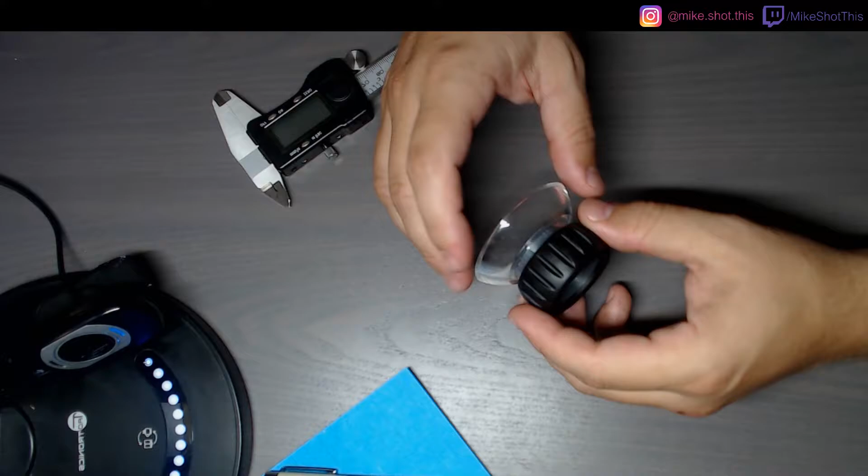Today I got this thing. This is for old people like myself who cannot see very well. So when I'm looking at film, I've started using it.

So you can kind of start to see, but it is a magnifying glass in there. And so generally speaking, I will look at it to make sure that the image is in focus or something of that nature, and look at any scratches that might exist on the film. But that doesn't really help the stream work.

So I have an old webcam that I am planning on setting up to use something like this. So let me get it lined up here, and then we'll focus it.

That looks a little blurry to me. That's about right. But I don't want to tape this down, because it might not line up very well.

So my plan is to simply - well, simple is a relative term - make a mount that fits here and holds this camera right where I want it, right about there. I'll get it actually centered up once I start measuring. The idea is I want to be able to show you guys what I'm seeing when I look through this. So we have to start with, what do I know? Let me jump back to this a little bit better for you guys.

So I know the piece needs to fit onto here, so I'll need to figure out the diameter of this. And then we'll need to figure out the size in this direction, and then we're going to make a piece that fits down and maybe even clips in over the top and clips underneath this lip. It's kind of hard to see, but we'll have it clip underneath this lip, and then we'll have it clip on either side of the camera - right here and on the other side, and potentially on the top or the bottom here.

So what does this piece need to look like? This piece needs to look like this, and then it'll come out to here and clip over. So that's the rough idea of what I'm thinking. This will sit here, and the camera will plug in here.

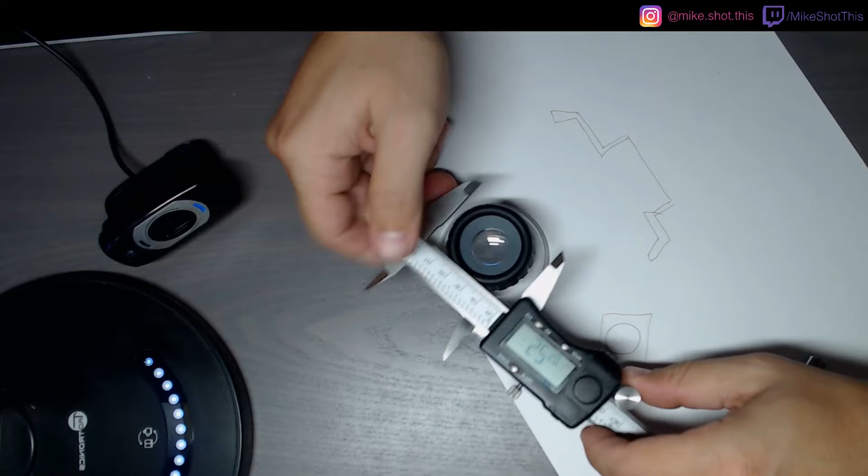Now let's measure the diameter of this bad boy, which is about 45 millimeters. We'll call it 45. This says 44.87, so close enough to 45. So we know that this dimension, the inside dimension, not the outside, needs to be 45 millimeters.

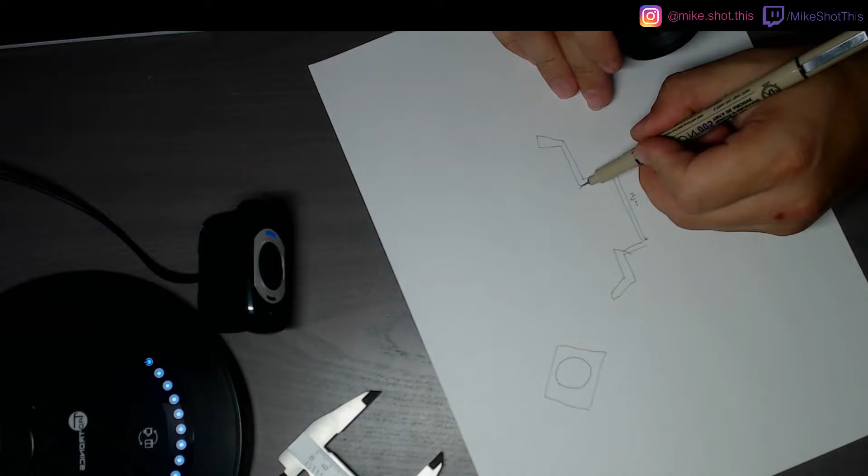And then we actually want this camera to live immediately on the surface of it. We don't want to have a gap or anything. So on that surface, this is going to be the top of the focus ring for this lens - it will actually live right to this point here. So we need our hooks to begin.

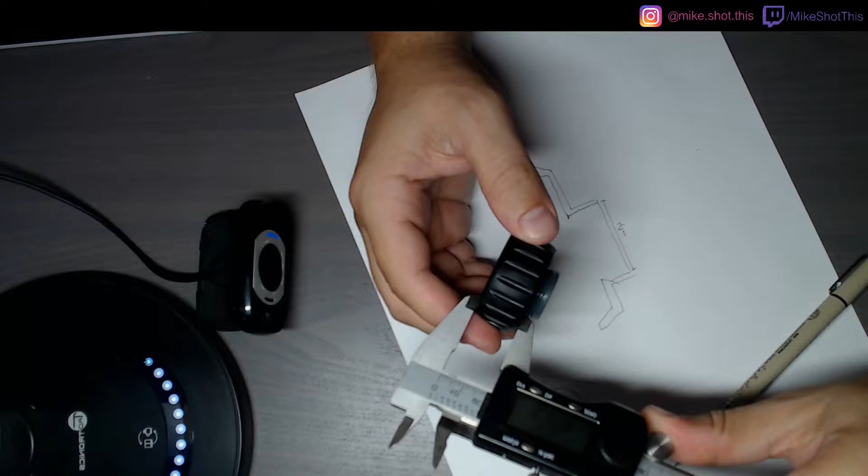Let's unscrew this here. So this is 20 millimeters - it's rubber, so it's kind of hard to tell, might even be 21. Yeah, it's probably about 21. 21 is a safe number. Actually, it's rubbery, so we can cheat it a little bit - we'll cheat it down to 20. So the height of this is going to be 20 mil.

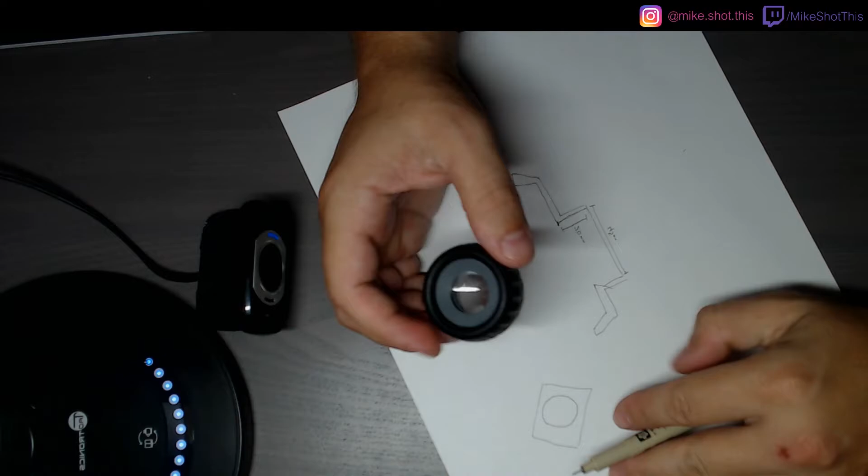And then that puts the center of this at 45 divided by 2, which would be 22.5. On center is 22.5, which means that I need to come off of the center of this 22.5 millimeters, right about there. So that gives me about to the beginning of the L in Logitech.

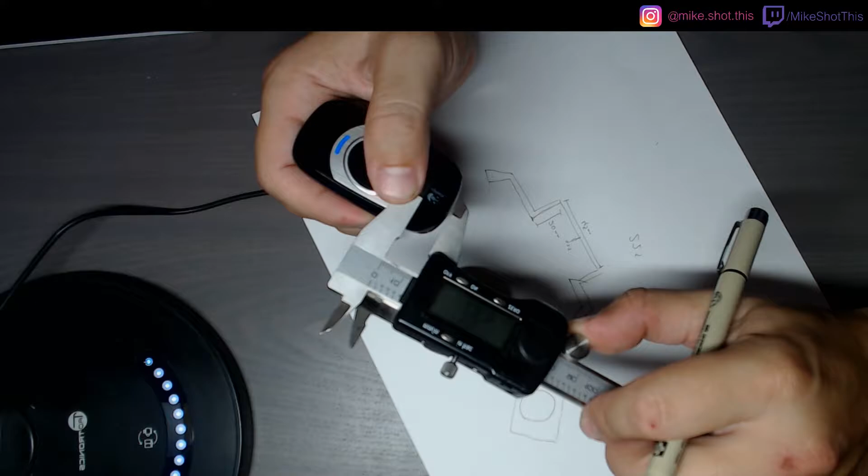We're just going to eyeball this first one - 12.5, call it 13 millimeters. 13 millimeters from here to the edge is 13. And thickness to the lip here is 10 mil, so this lip here is going to be 10.

And then we can clip as far in as - let's flip that around - we can go 4.5 millimeters in on the lip. So let's draw a lip onto this and then say 4.5. I'm going to guess that that is 4.5 all the way around, just based off of how it looks. Yeah, it looks like it's about 4.5 on either side.

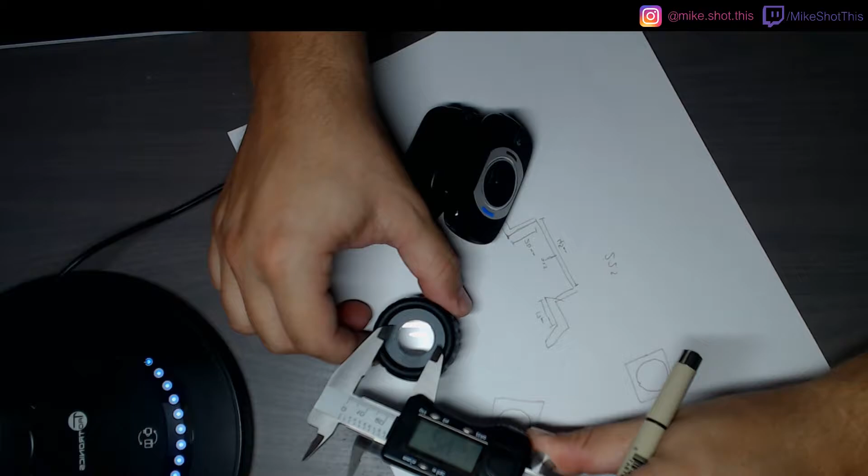So now we need to take the measurement from here, which is 40-ish. We'll call it 40 and a half. So where's that dimension? I don't have that on here, so let's do the top down view. I think I was trying to do a top down there. So this will be here, here's the centerpiece. The diameter of the centerpiece will actually be - we're going to go a little bit wider than the actual thing here, so let's call it 24 millimeters, which is about an inch. So this diameter is 24, which puts - so this will actually extend out, and then the clips are going to be here.

And obviously it'll be mirrored on this side. So this will be 13, because we have that number from here. We know that this is 45. Let's see what else we can measure here. The center of this is 22.5.

Where else? All right, I was measuring the width. I need this dimension, which I believe we came up with 40 and a half. So 40.5, which center is 20.25. Cool. All right, that gives us a rough idea of what this should look like. We're going to go ahead and get started on that.

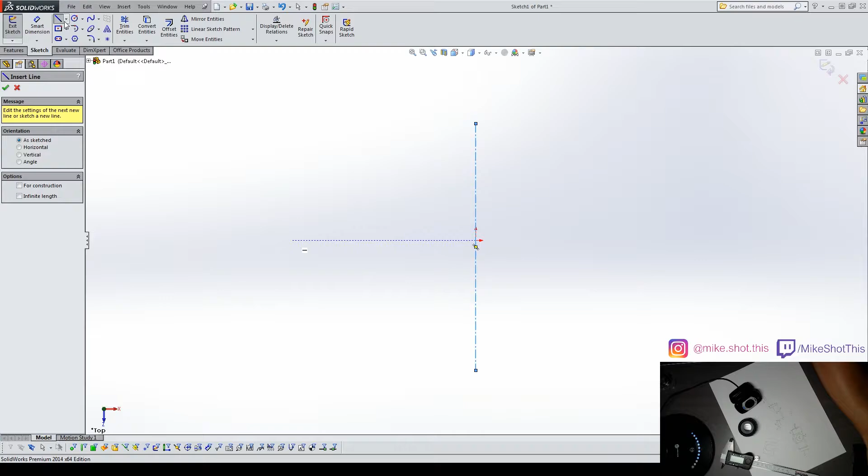Let's go ahead and jump into SolidWorks. What's the first thing we need to draw? Well, let's give ourselves some center lines. We'll go here, and we'll just eyeball these. They don't need to be exact, they're just geometry. Don't need a new line.

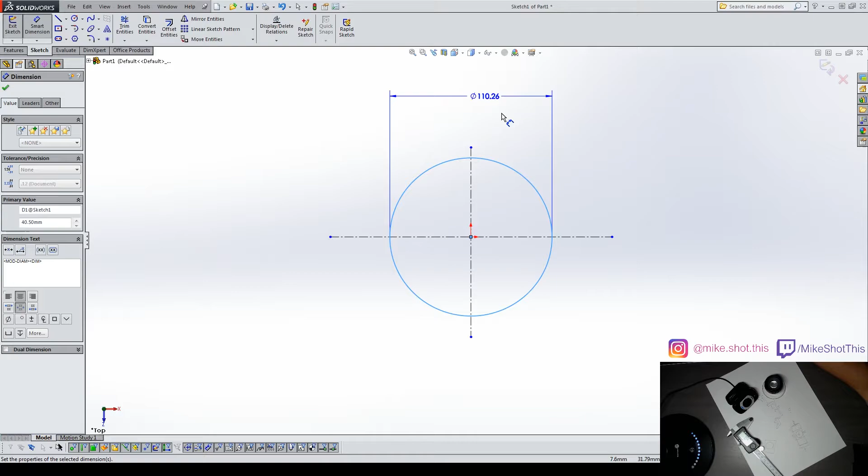So what I need is going to be this first circle. That is going to be the hole that the camera can shoot through. Yeah, about 40 and a half. So 40.5. Cool. So we will build off of this circle.

So we need this piece to live right in this little hole here. Let me switch it over. So we need this piece here to live right into this little slot. So we want these walls to extrude up 20 millimeters, which is this height here. And then we'll build a clip-on underneath it that will attach to this piece here.

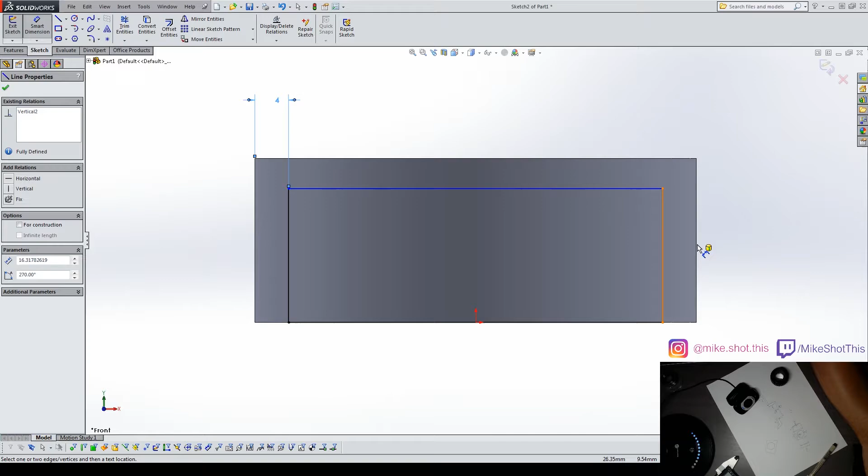And we are going to do a corner-to-corner rectangle. We're just going to eyeball it there. Smart dimension. We know that wall is 4 millimeters thick, so we'll go 4 millimeters there. 4 mil there. 10.5 makes more sense. So 10.5 is the bump here.

Let me turn the light a little bit. That's the highest point. Yeah, 10.5. Cool.

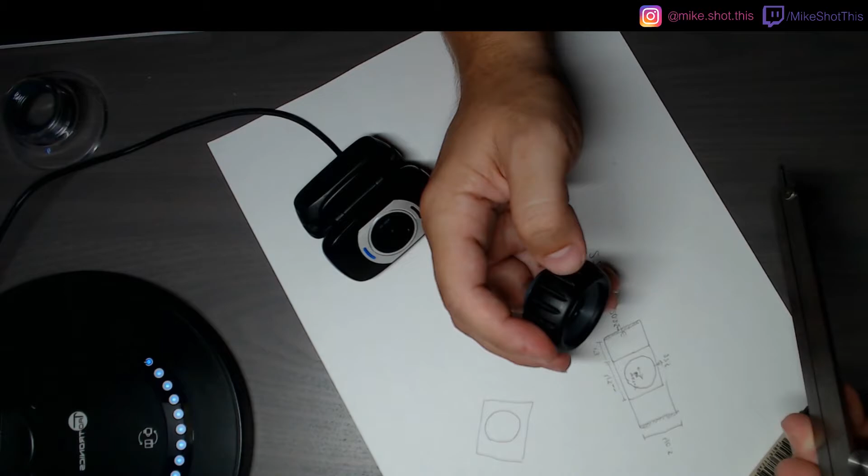How do I do this? So I actually want it to extend down a little bit further. How much further do I want it to extend past the halfway point? So the reason I'm doing this is it will provide a tight fit on the inside of the ring that we've made.

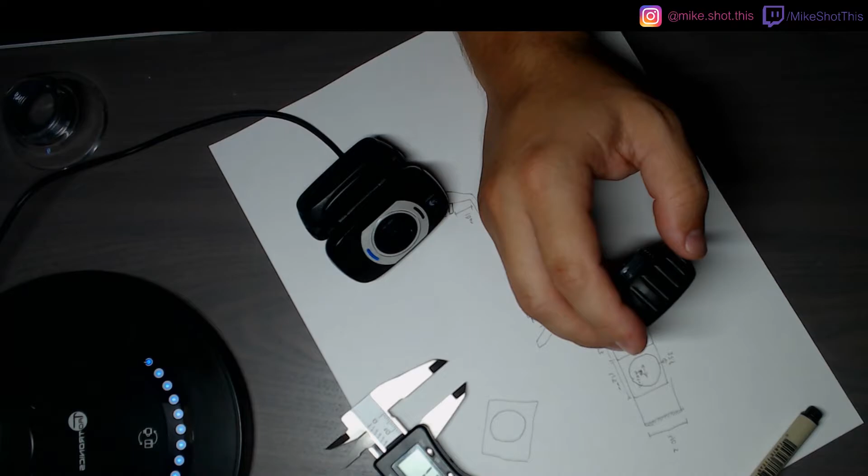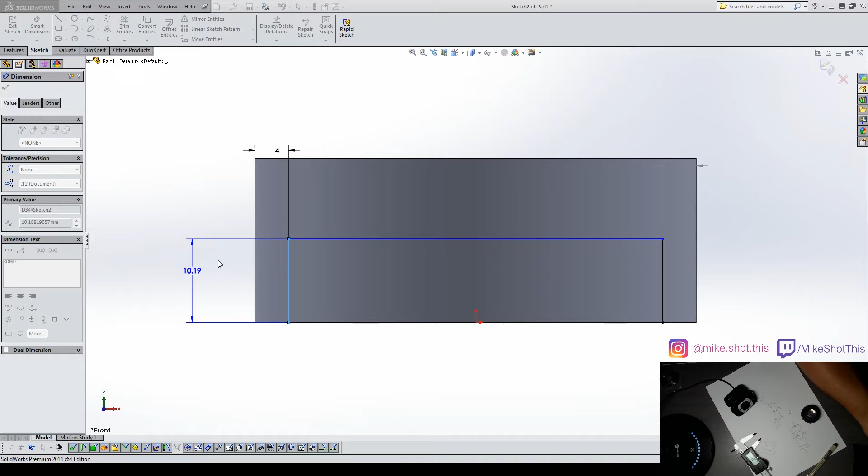So let's do this. So 14 is the height, right? No, we want to do 14 minus 20. Oopsies, never mind. I always mess this up, I always subtract the wrong number. So it's 20 minus 14, which gives you 6.

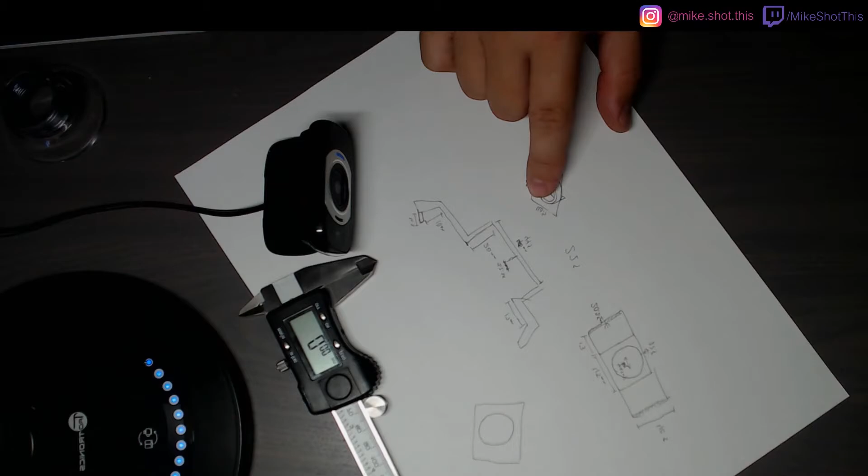Cool. And then I want to do a box around this. And this box is, so if the camera is 40.5 to the edge here, I need to make it a little bit bigger. So I've been doing about 2 millimeters on each side. So we'll call it 44.5 as the width of this.

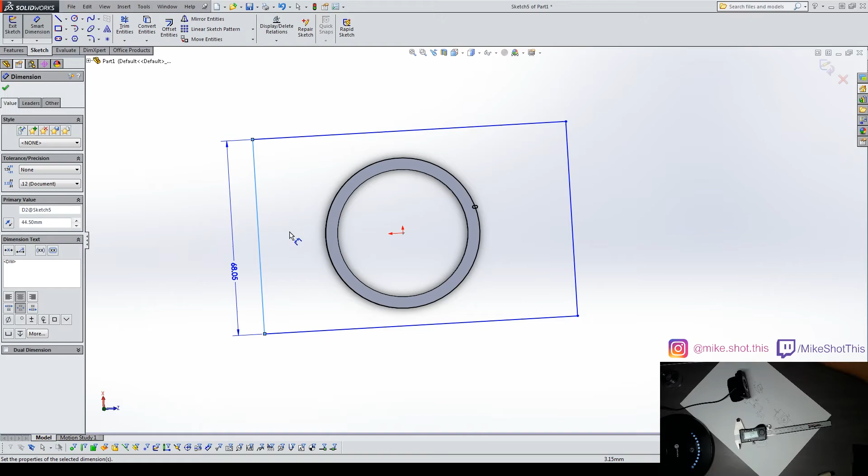So it's currently set to that. So let's go 5, and that will give us that. And then the length of it is 68.75. So we want to do the length of it to be 68.75 plus 4. All right, that gets us our shape.

And now we can hold this. So 72.75, divided by 2, will get us in the center there. And then 44.5 divided by 2, about 22, will get us centered there.

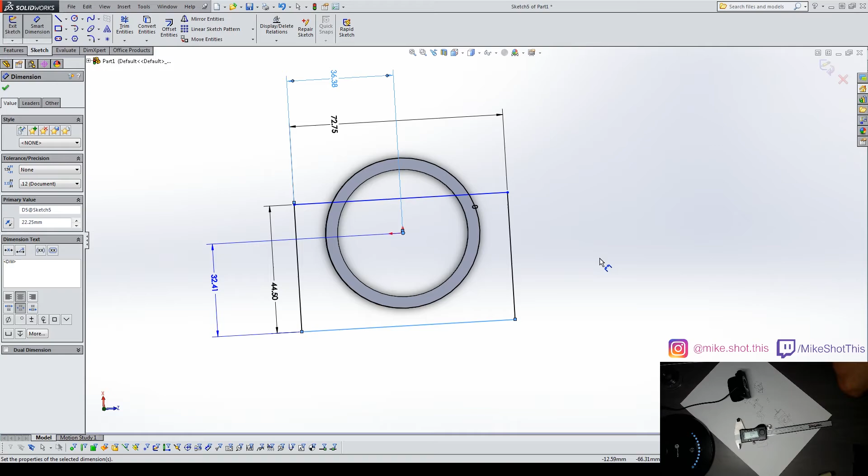So we messed up somewhere. Where did we mess up? Where did we mess up? We messed up because this piece is physically larger than the camera itself. So what have I been getting my numbers off of?

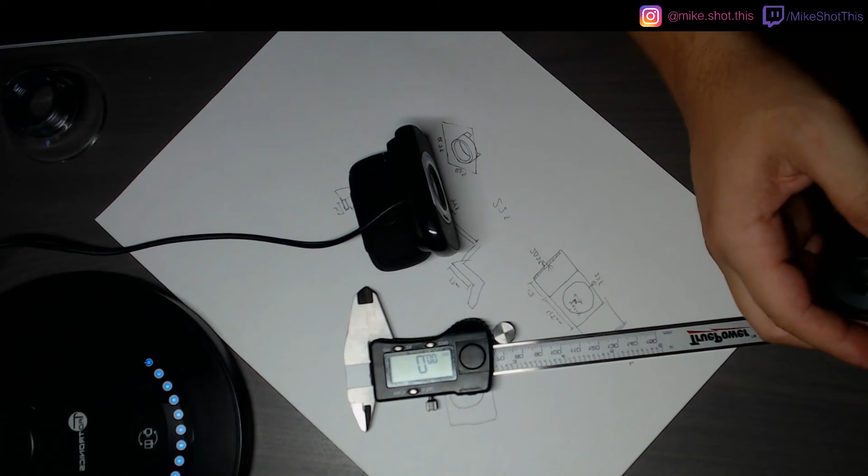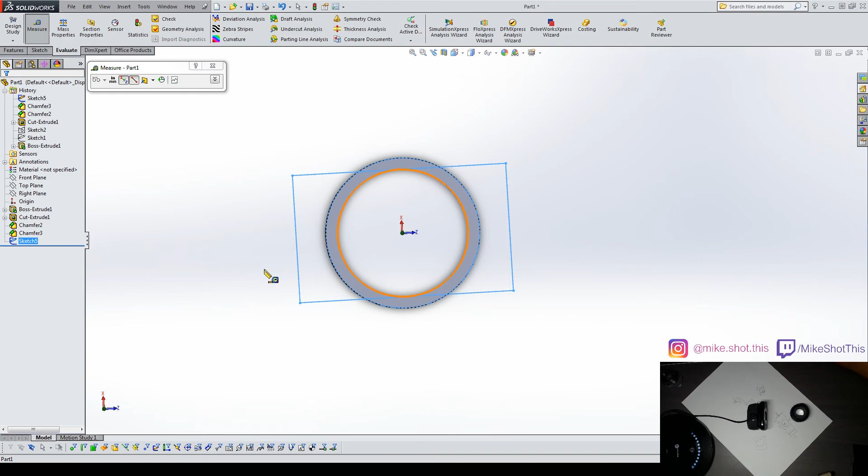Let me exit this sketch. What is this? 44.5. That's that number, so it should come up to here. Which is larger than this, and I made this smaller. Interesting. Something is not working out.

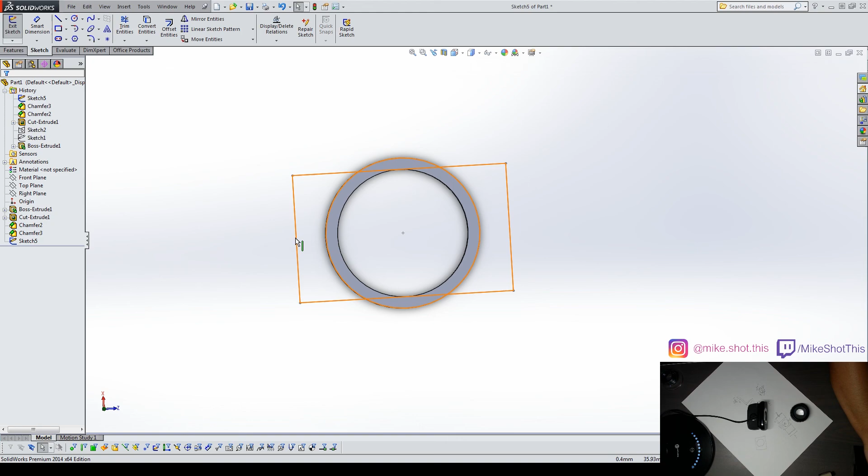So this is the size of the camera's face. I'm going to print this and then make another video eventually. But that is enough for today.